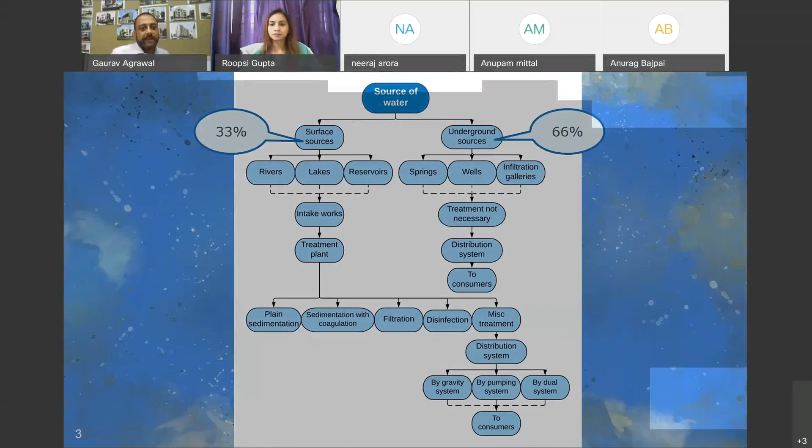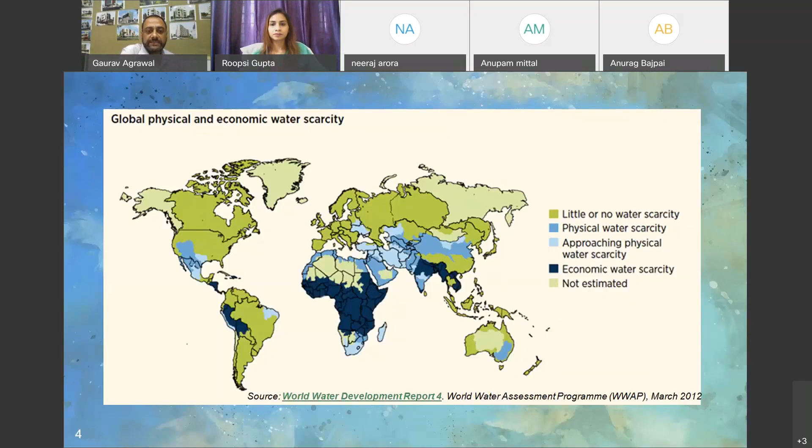अगर हम इस चार्ट को देखें, इस मैप को देखें, so we'll find that a large percentage of world's population still doesn't have an access to clean water. कितनी विडंबना है जीवन की. ये स्लाइड को मैंने स्पेशली इसलिए लिया because we fall under this category.

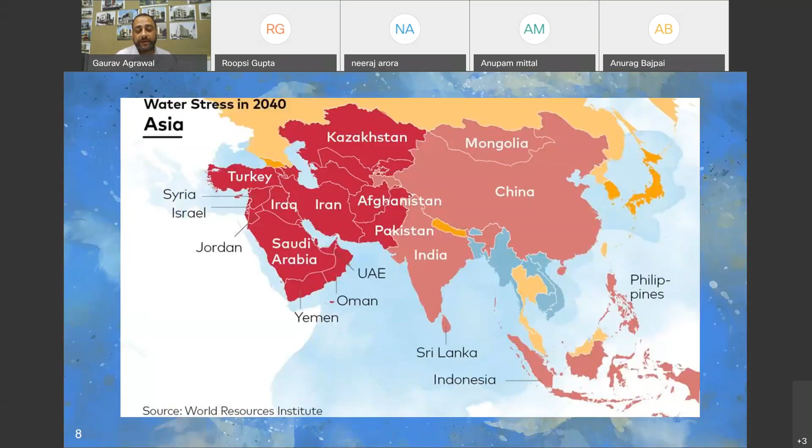Now, if we talk about Asia, all the part you can see in pink and purple color, or a darker pink, I must say, is under water stress. So हमको लगता है कि यूएई में, दुबई में, ईरान, इराक के अंदर रेगिस्तान है, that's why they are, but we are again in India as a subcontinent, we are still in the stress condition.

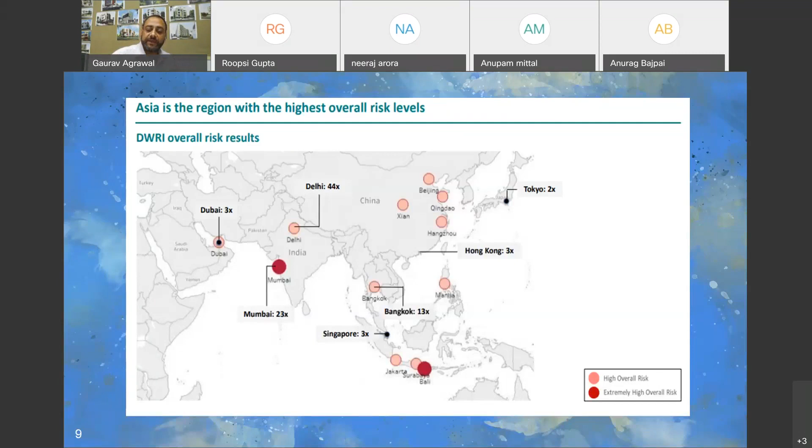Now this chart, this map will show you a clear picture. You can see Mumbai being a place which is on the coastline, Bali which is a place on the coastline. They are at the highest risk. So if we talk about 10 major cities in Asia and region, you will find that Mumbai is one of them. Now we talk about India.

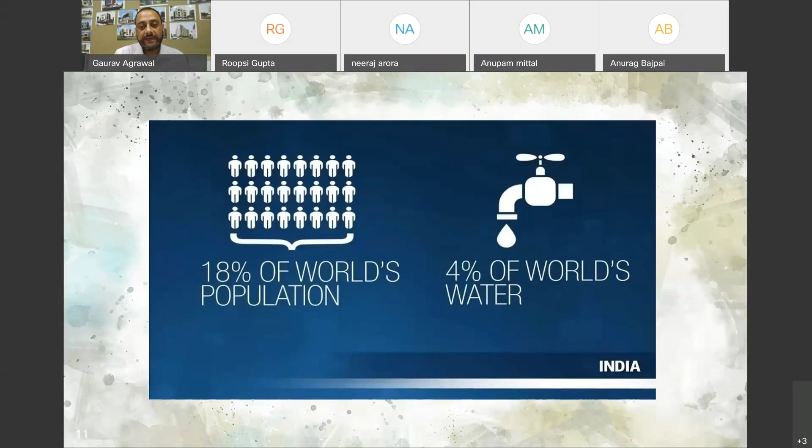2020 मुझे पता है हम सबके लिए एक बड़ा ही इस तरह का साल रहा कि we have so many pandemics, so many things, so many natural disasters कि we all are praying कि हे भगवान 2020 फटाफट कट जाए. Please add one more line to it. 21 Indian cities are expected to run out of groundwater by 2020.

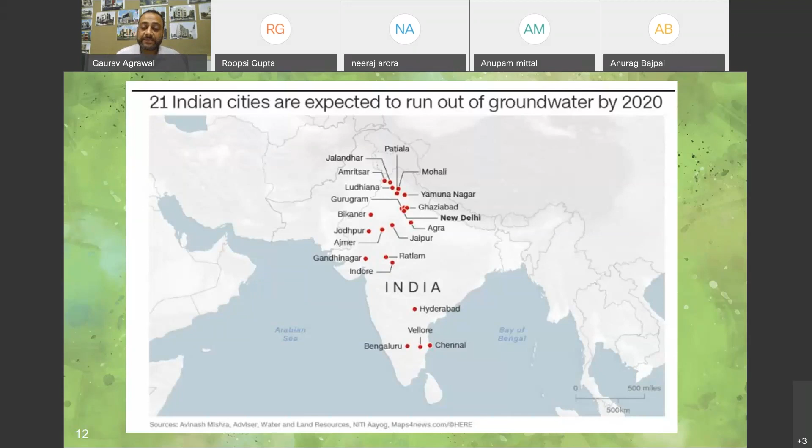आज का फिगर अगर मैं चेक करता हूँ, if I talk about recent, we have like almost 37-38,000 liters per person water, which makes out around 104 liters per day.

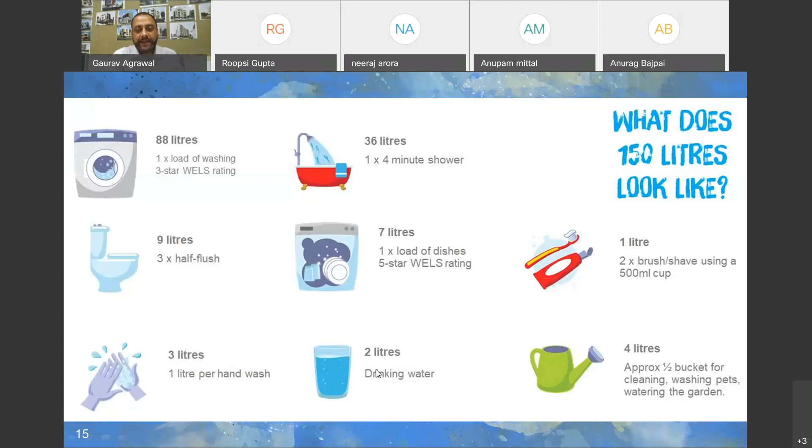If I don't get this water, what will happen? Then I think that day you start conserving water and you will be using water consciously.

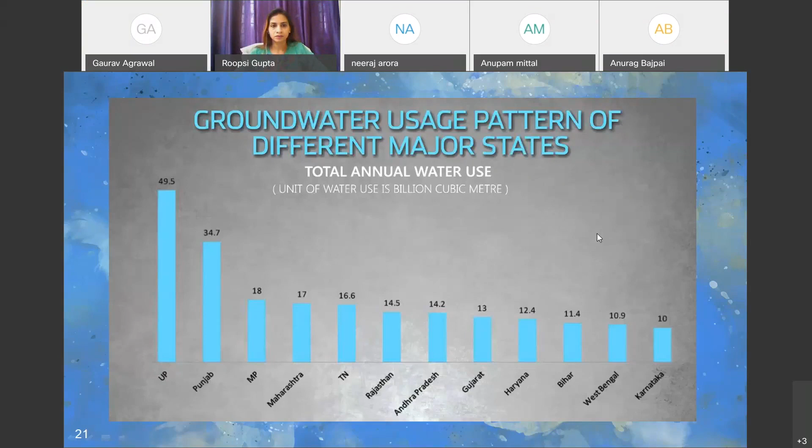One more slide. So if we talk about this graph, let me take an example of Uttar Pradesh again.

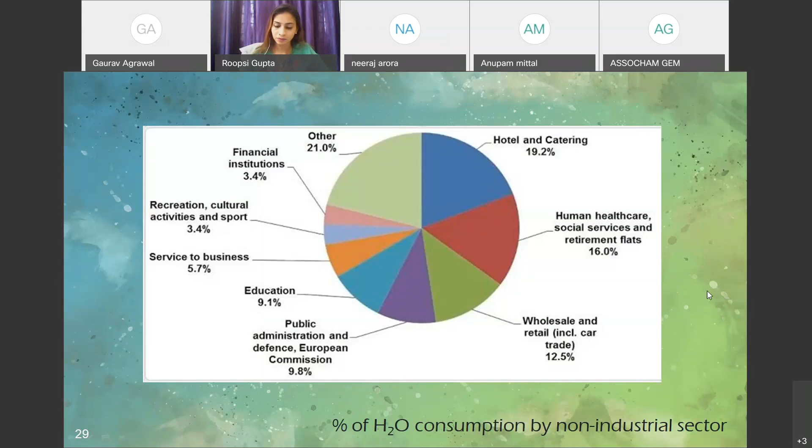Since you are all students of architecture and engineering, I thought to make this a bit more technical. So I'll take hotel as an example, and we'll see where the areas of water consumption are and how to conserve it. So when we talk about a hotel, we find that there are certain departments.

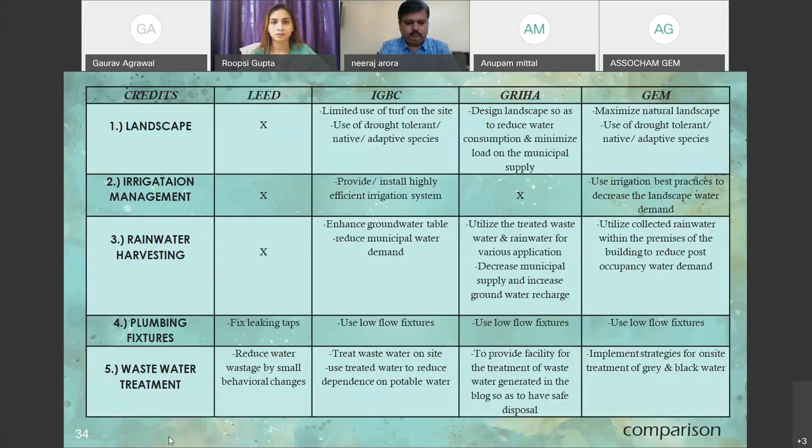Then I have made this comparative slide for inferences, where I have tried to mention what we should do in landscape, what we should do for irrigation management, then what about rainwater harvesting and plumbing fixtures. So I'll take rainwater harvesting as an example.

Install a suitably designed rainwater storage system and recharge pit to cater to roof and non-roof waters. So whatever water we have, we should collect it, store it, and use that water, and it can help recharge or replenish the groundwater of our area. Why not create a big water body? If we are designing a 5-star hotel, we should create a big landscape water body where lotus and ducks can live, adding a landscape feature to your property while also recharging your groundwater.

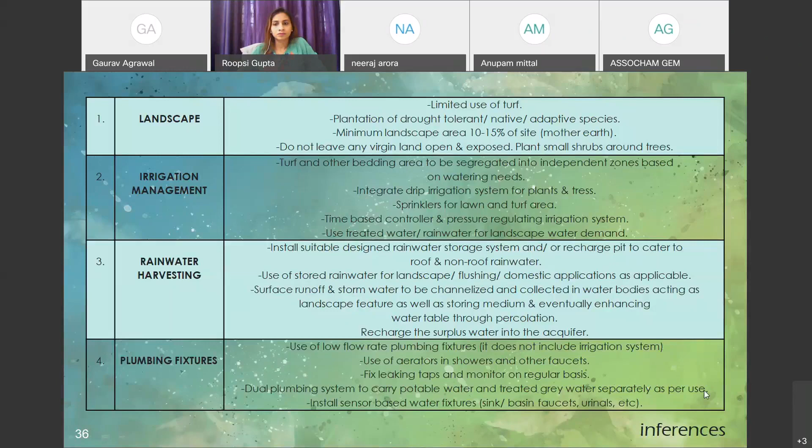So like this, I have jotted down all these standpoints and what is to be done in which field and how efficiently we can do it. And since we all belong to the architecture and engineering side, I must also take one more point: construction.

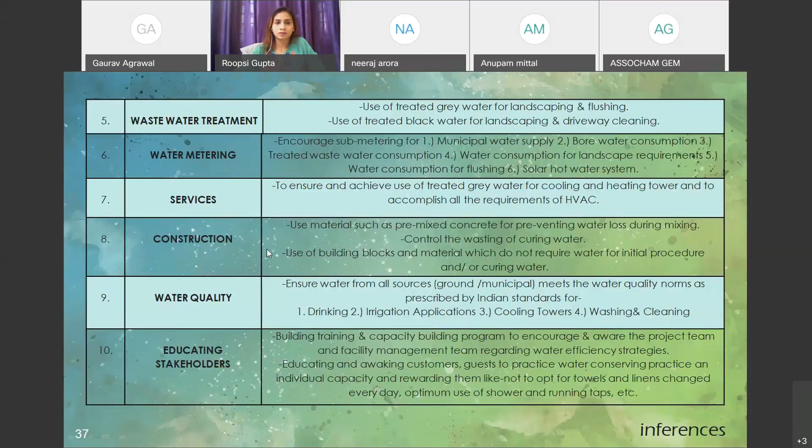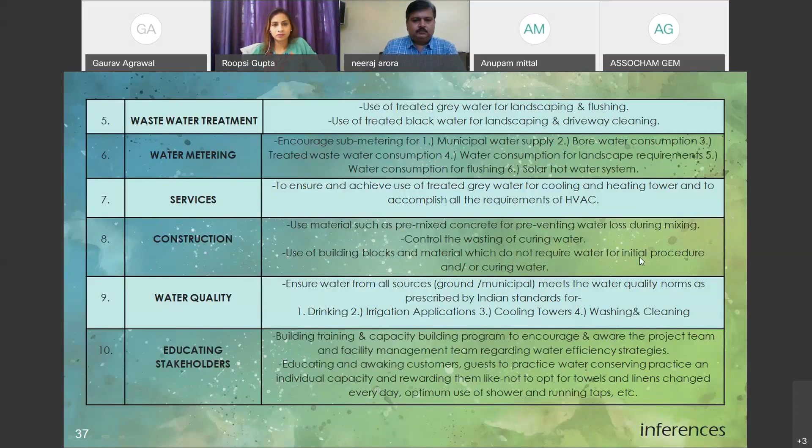Use materials such as pre-mixed concrete to prevent water loss during mixing. Control the wasting of curing water. Use building blocks and materials which do not require water for initial procedure and also for curing.

So if we talk about conclusions, let us take one department at a time. So these are guest rooms. Shower flow should be no more than 10 liters per minute. This should be a criteria, and it can be very simply measured with a bucket and a stopwatch, so we know how much water we are using.

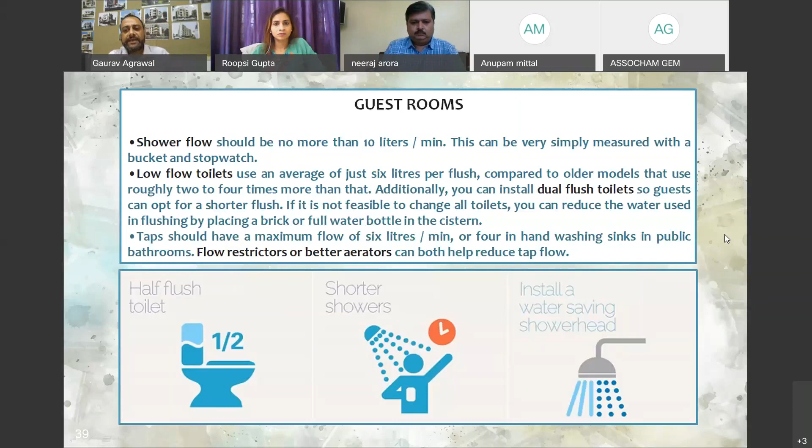We all know these things, but the question is how much are we actually implementing them. Use low flow toilets, use dual flushing toilets, use flow restrictors or better aerators. For laundry, always use a fully loaded machine and minimize the rinse cycle, reuse the water and treat it so we can reuse it again.

Maintenance is an important issue. Check for all the leaks in the plumbing system. Always go with 5-star rating machines and update your machines, and try to use ozone laundry systems, because when ozone is injected in water it gives you a very efficient wash.

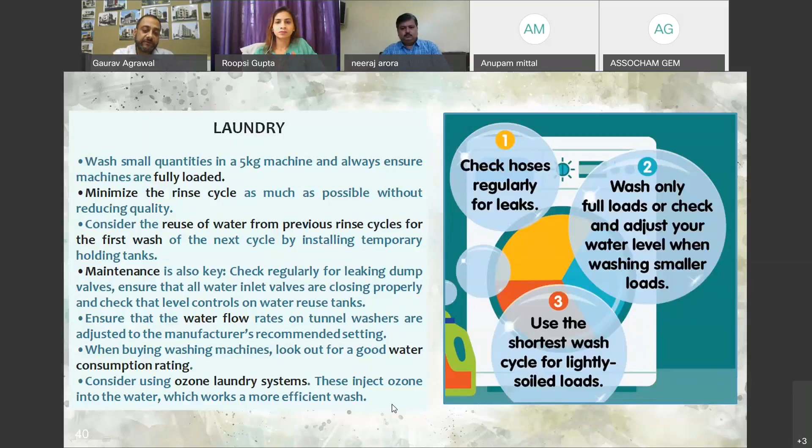If we talk about landscape, the best time to water is either early mornings or late evenings. You can fix up the timings like that. A timer should be fitted with the sprinkler system along with a moisture sensor. It shouldn't happen that it's a rainy day and the gardener has still been told to water morning and evening, and he is busy irrigating the landscape.

So if we have moisture sensors attached to it... I took the hotel as a case study because the maximum water is consumed in this sector, and it's a kind of lavish sector.

We can adopt such things in this kind of project. Use grey water from bathing and sink areas to irrigate our lawns, and please use native species. There is no point using some exquisite variety from somewhere else, planting date palms when we are in a bone dry region or a composite climate.

In kitchens you should use the dishwasher only when fully loaded. Pre-soaking utensils - we do this in our homes too, soaking dishes before washing them - if management educates the staff, it will definitely use less water.

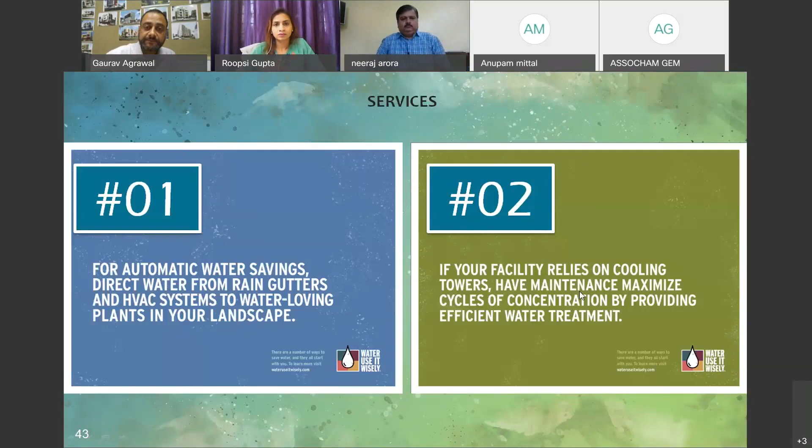We can save water for our HVAC systems. We can use treated wastewater for our cooling tasks. For swimming pools, we should have regular maintenance.

When we are backwashing, many people apply it for landscaping. But I sincerely say that if you use this water very intelligently and amicably, you can use it well.

Once you fill a swimming pool, there's no need to change the entire water for 3 to 4 years. I'm telling you, 3 to 4 years. So use it sensibly, cover swimming pools as far as possible, and we can install push button showers in our pool areas.

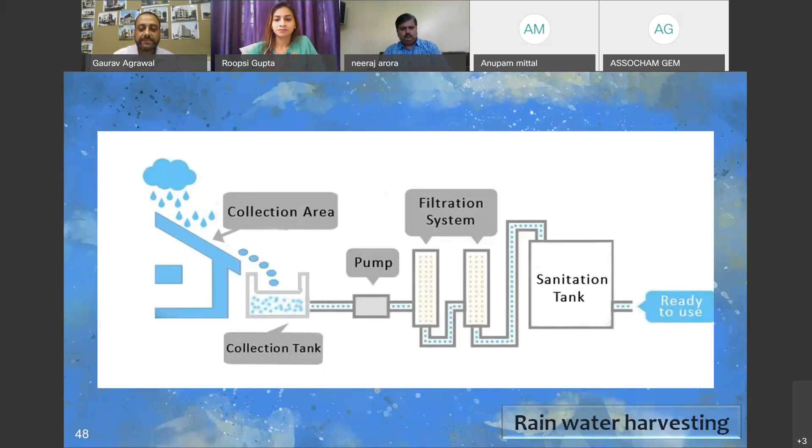The need of the time is rainwater harvesting. This is a very simple process. This doesn't require any major financial arrangements. So start thinking about that, and once you step out as a professional, please practice this in all your projects, may it be a small project or a big project.

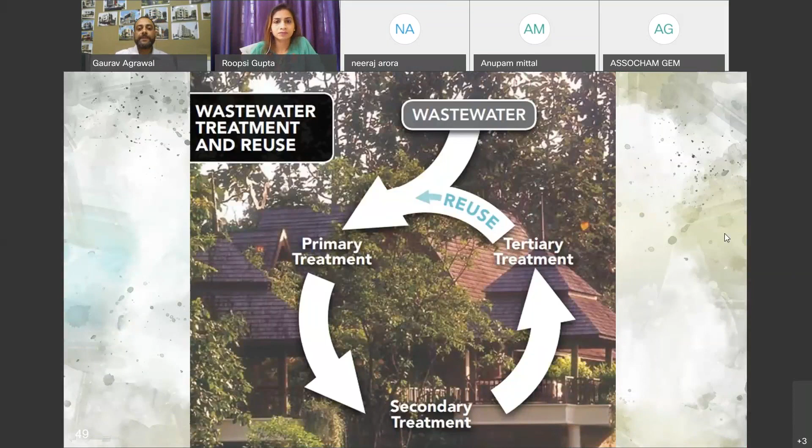And these reuse programs of wastewater. The wastewater which is generated at site should be primary treated and then reused. If it needs secondary treatment, do it and reuse. And if it needs tertiary treatment as well, then do it. Why not do it? So I'm moving towards the end of my slides. I think 4-5 slides are only remaining.

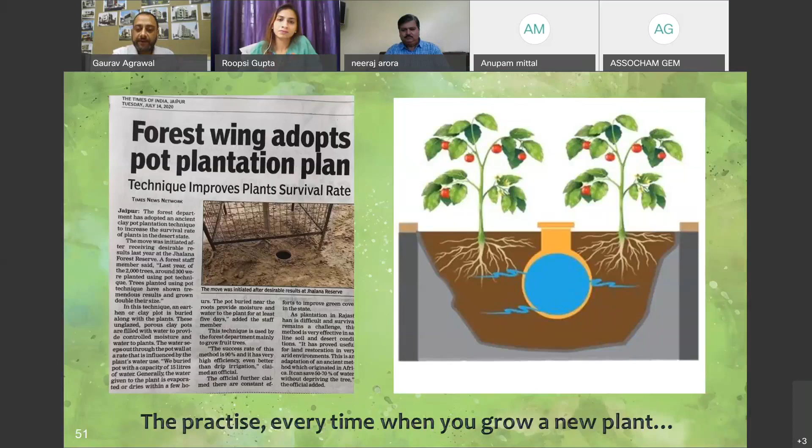So this is my take. This is my advice to you. Please take this along with you to your home and start practicing right from your home itself. Please save water for our future generation. It's not our ancestral property. We have to start thinking in terms that we have borrowed this from our coming generation.

So thank you all so much for patiently listening to me. Please think about it, because वो दिन दूर नहीं है जब हमारे लिए ये एक समस्या हो जाएगी, how to get water, how to have access to water, and how to have the minimum 2 liters of water which you require for your body every day. Thank you so much.

Sir, it was a very informative session, and the topic of the day is very interesting for all of us. It's a very new and innovative thing which we learned today. I learned a lot from your presentation; as we all know, water is our natural resource, and it is very precious. This presentation was so helpful on how to use water efficiently, and it is very helpful for students and all the participants who are listening. It's a very wonderful session.

Thanks a lot, sir. And hope in future also we get very nice techniques to learn, like rethinking. Refuse is the great word of this session, that we should learn how to refuse things. Sir gave one small point, that we should keep our utensils wet while we give them for cleaning. It's a very small point, but there is a lot of learning from these small things in daily routine.

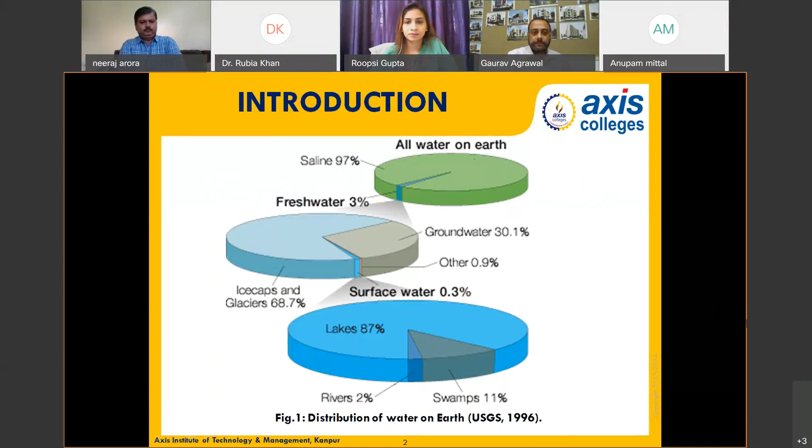So today I am going to do a discussion on groundwater and its engineering significance. I think there's no need to explain this slide because Gaurav sir already explained much about how much groundwater we have and all these things. It's important. So I skip this slide and move to what is groundwater.

So my dear friend, groundwater is the water which occurs below the earth's surface in the zone of saturation. It is very important for the sustainable development of life. And this groundwater is the water that's stored underground, not as a river and lake, but mostly filling the pores and spaces between the rocks and soil.

Groundwater supplies drinking water and is used for irrigation to grow crops. It is a component in many industrial processes, and it is a source of recharge for lakes, rivers, and wetlands. But nowadays, due to increase in urbanization, industrialization, and agricultural activity, there is high stress on groundwater resources, due to which day by day the quality and quantity of groundwater is deteriorating.

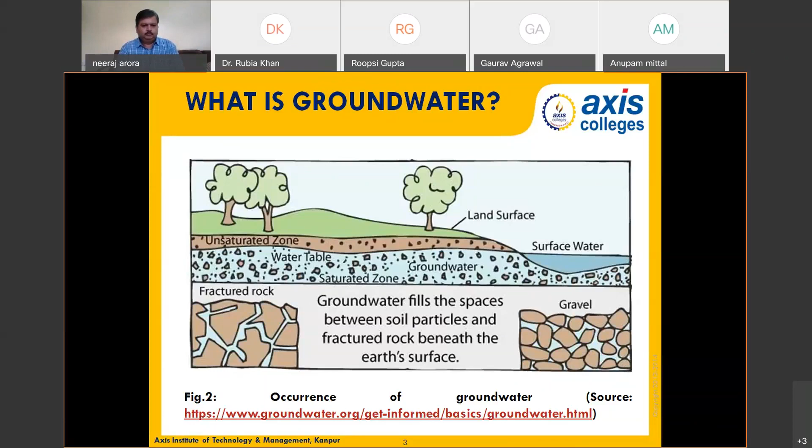So, before moving, let's understand how groundwater occurs below the earth surface. This diagram shows the vertical distribution of groundwater below the earth surface, and you can see it is divided into mainly two divisions. One is the unsaturated zone and another is the saturated zone. The unsaturated zone, also known as the zone of aeration, is just below the earth surface. After this you will find the zone of saturation where groundwater occurs, just below the

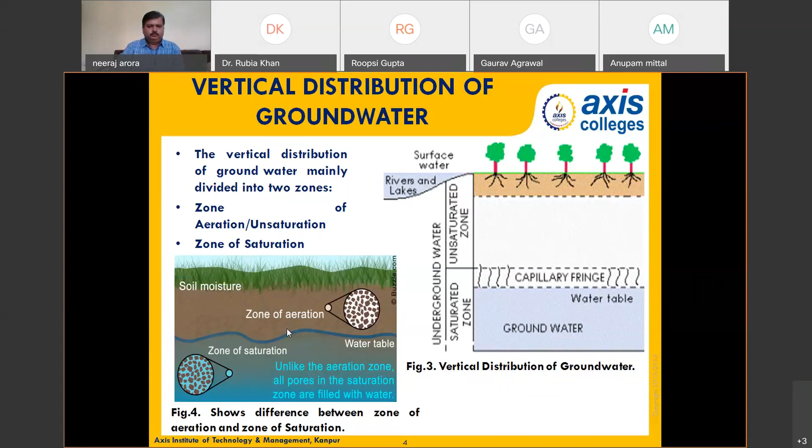groundwater level. In the zone of aeration, the pore spaces between the rocks and soil are partially filled with air and partially filled with water. But in the zone of saturation where groundwater occurs, the pores between the rock and soil are fully filled with water. So this zone where pores are filled with water, we use it as groundwater. So this is the general scenario of how water occurs below the earth surface.

Now, Gaurav sir already described the various sources of groundwater pollution. Here I would also like to add something. Groundwater can be contaminated from natural sources or numerous types of human activities. We categorize groundwater pollution mainly into two categories: geogenic pollution and anthropogenic pollution. What is geogenic pollution? It is mainly related to natural sources, like contaminants from rock and soil. They dissolve in the groundwater and contaminate the water.

And next is anthropogenic activity. It is mainly due to human activities, like improper siting of your septic system, improper practices we use in our agricultural activities, hazardous waste disposed improperly on the earth surface, and urban runoff. Let's take one example of the septic system.

If we construct any drainage or any pipeline improperly below the earth surface, then what happens? If the groundwater level is near this septic system, and somehow leakage happens, then the contaminated wastewater present here infiltrates into the groundwater and may contaminate the whole aquifer. And what is an aquifer? An aquifer is a water bearing formation. So it contaminates the whole aquifer.

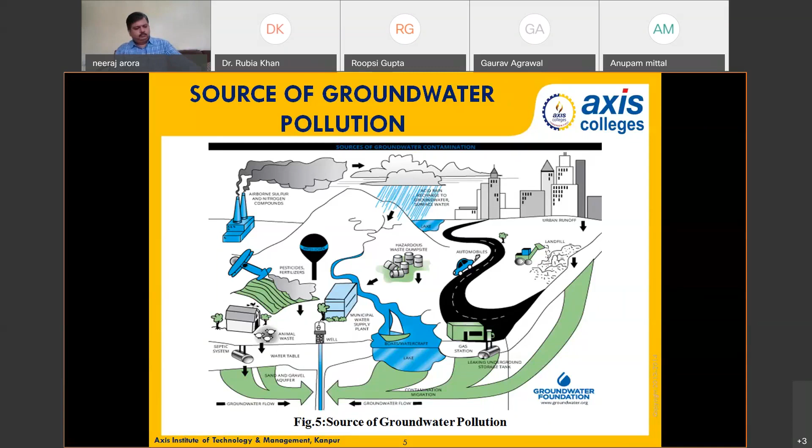Now let's talk about the engineering significance of groundwater: how groundwater is important for engineering purposes, like construction for major and minor projects. Subsurface water or groundwater is often a very critical factor in various engineering works. It may pose problems not only during the construction stage, but it also has a potential effect on the functioning

of an engineering project. Almost every engineering project, like buildings, highways, pavements, airport runways, dams, underground structures, whatever structures are on rock and soil, and slopes, may be affected in one way or another by subsurface water, which may lead to failure of such projects, causing loss of life and property. Therefore, it is an important aspect of any engineering investigation to assess the possible adverse effect of groundwater on the proposed

engineering project. In fact, it is not only groundwater affecting the engineering structure; in many cases, the construction of the structure will change the subsurface water regime and even deteriorate its quality and quantity. So groundwater affects site selection, cost, durability, and even the safety of structures. Groundwater plays a prominent part in slope movement, volume changes by shrinkage and swelling, and collapse of loose soil.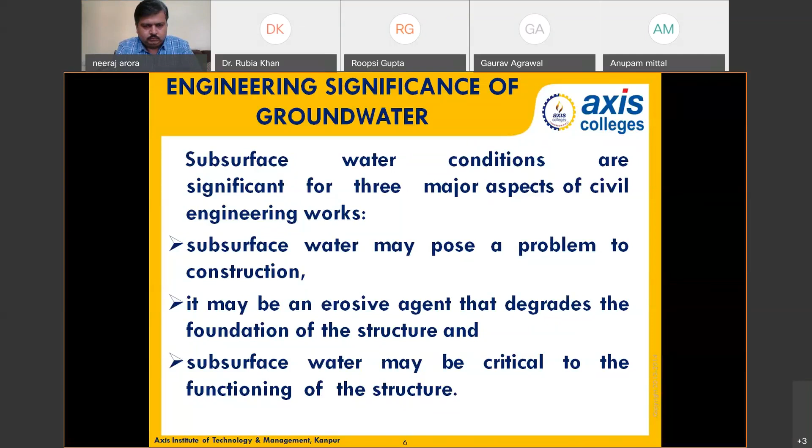So let's take some examples. First, the tunnel. You all know a tunnel is an underground passage dug through the surrounding soil, earth, and rock, and it may be used for road traffic, rail traffic, or as a canal. Groundwater has the potential to cause great difficulties for underground works. Effort should be made to define the subsurface water regime. Data on aquifers, sources of water, water quality, and depth to groundwater should be collected.

The most serious problem encountered during excavation is the sudden inflow of a large quantity of water. Groundwater and seepage pressures are the major factors for flowing and squeezing ground. The possible highly corrosive effect of water on the lining of the opening should be considered. On the other hand, construction of a tunnel may vitally change the water regime of a locality. Groundwater not only influences the construction site, but the construction of the tunnel can also affect the direction of groundwater

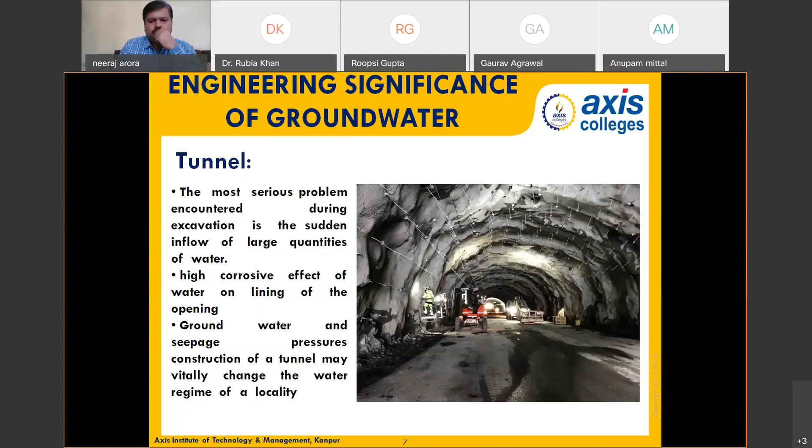of that area. The concept of water regime involves the location of water within the rocks, its direction and velocity of movement, and changes in both location and motion in time, seasonally and so on. Now let's take another example, the dam, and how groundwater or surface water has engineering significance on a dam project.

Dams are generally constructed across a river valley to impound water behind them to form a reservoir. Dam foundations are laid down at a great depth. Why? Because it is a very heavy structure, so the foundation is laid at great depth depending on the height of the dam and the foundation conditions. In most cases, the deepest foundation level is below the natural groundwater level. Thus there will always be an inflow of water into the foundation excavation, which may hinder construction activities.

The presence of groundwater in the rock mass causes water pressure within the discontinuities, which results in reduction of cohesion and may cause instability of the reservoir and the abutment. An ideal site for a large impounding reservoir is a gorge with steep banks upstream, so that a small dam impounds a large volume of water within a minimum extent of water spread.

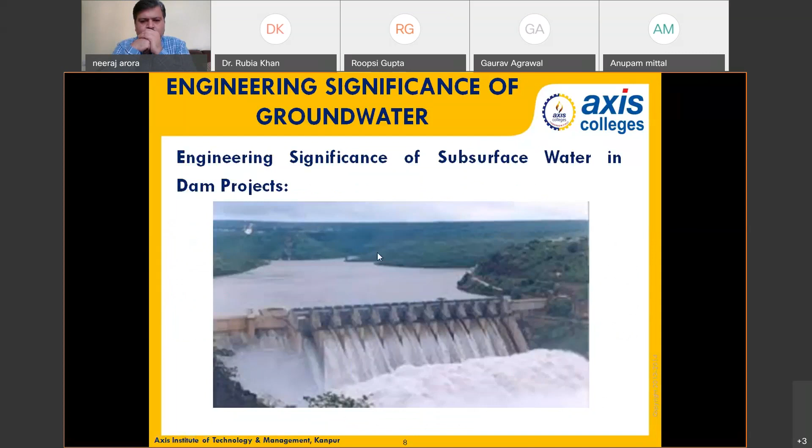Now the reservoir is an important element of your dam. Here you can see the reservoir where the water is collected. So what is a dam, and what is a reservoir, where we store the water? What happens if water is not stored, or there is leakage for some reason? To avoid these circumstances, we have to study the groundwater level for this project especially. For example, let's take this diagram.

Let's take this diagram. Here you can see the groundwater condition in the proposed reservoir must be truly established for an approximately accurate evaluation of storage capacity. So in this first diagram, as you can see, this is the top reservoir level, and this is the actual water level of your earth, below the earth.

So the general water table, as you can see, is above the top reservoir level in the proposed reservoir site, and this is a very favorable condition as there is no risk of water loss from the reservoir to the surrounding area.

And in this second... Rubia ma'am, sorry for the interruption. Actually, we are running out of time. Okay, this is my second last slide. Okay. Thanks.

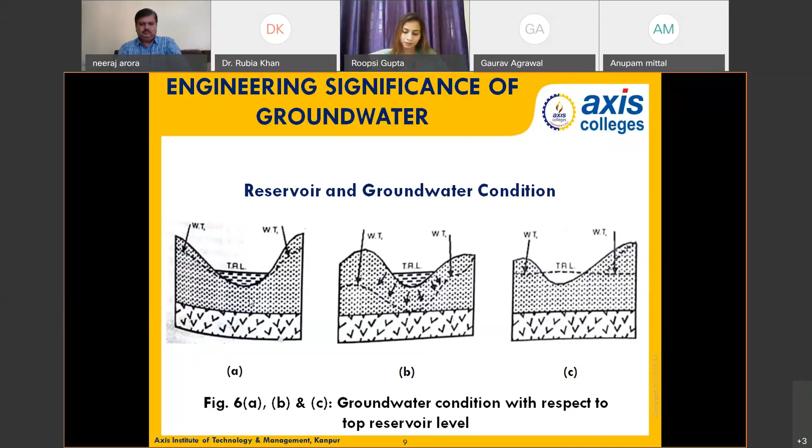Now, in previous slides, we talked about major projects like dams and tunnels. But here we can see that for building foundations and pavements, subsurface water also influences these structures. Groundwater has the potential to change the engineering properties of rock and soil. Thus, the bearing capacity of soil may be considerably reduced because of subsurface water, and the strength of rock is also affected when saturated with water.

Some soils, like expansive soils, when saturated, increase their volume by 20 to 30%. So bearing capacity is also less. This is how your building foundation and pavement may collapse.

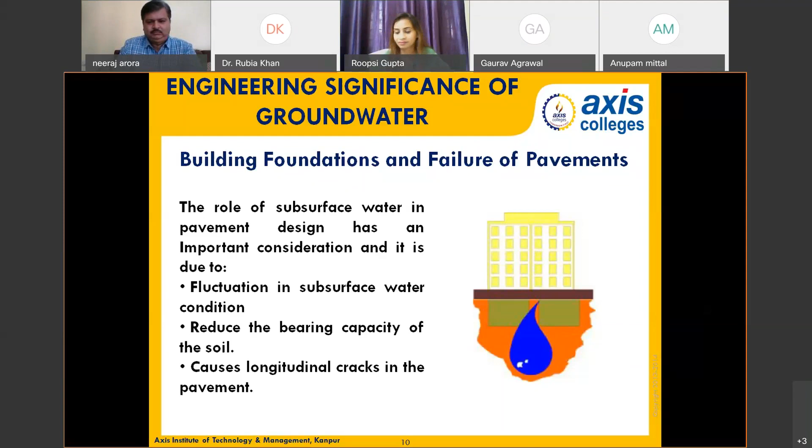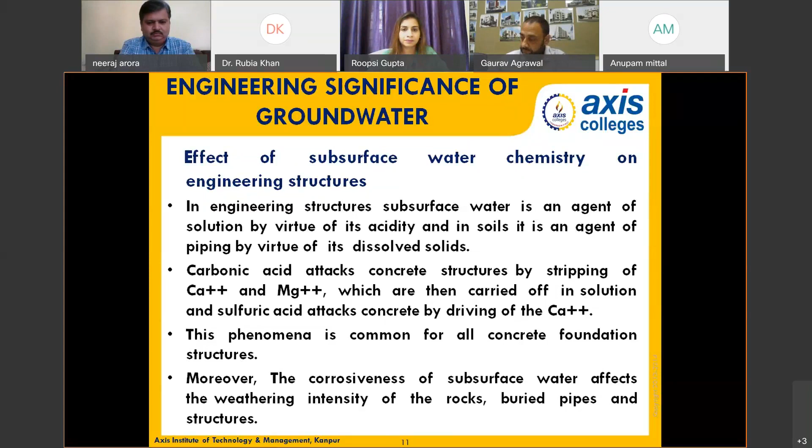The chemistry of groundwater also influences engineering structures. As you know, water is a universal solvent, and in engineering structures subsurface water is an agent of solution by virtue of its acidity. If carbonic acid is high in concentration, this acid will dissolve calcium ions from the concrete, and this process is common for all concrete foundations. So this is how groundwater is very important for every civil engineering student, and also for architects.